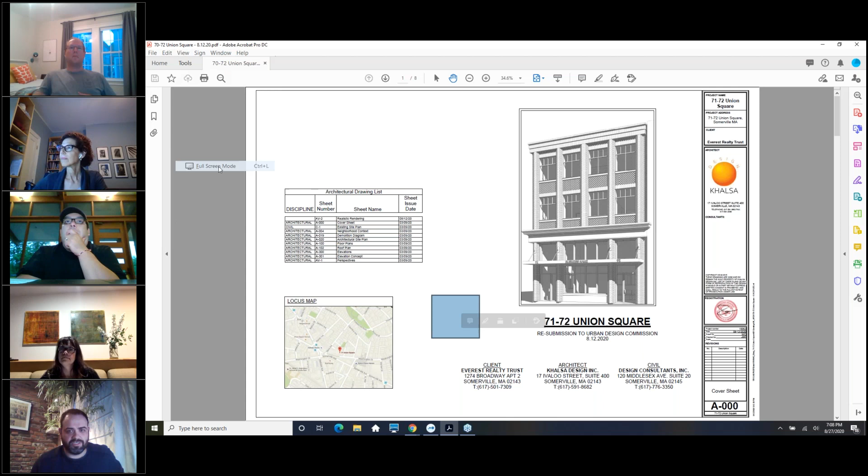So with that, I guess I will turn it over to Will Chalfant, the architect. Thanks, Adam. So how do I share my screen on this one? Because I'm not seeing that. Oh, look at that. Just as I said it, it popped up. Okay. All right, so can everyone see this? I can. Looking good. Okay.

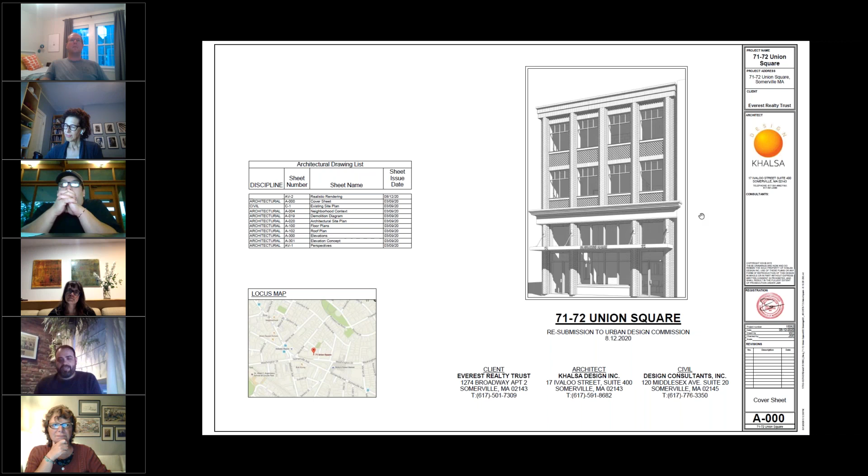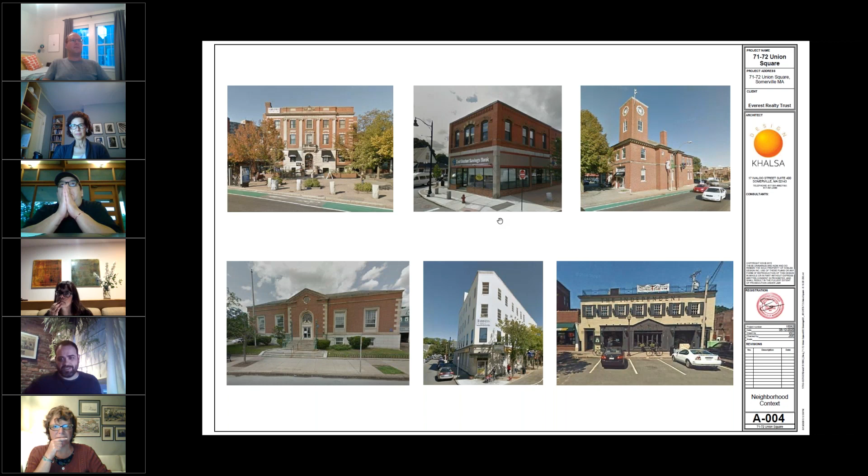All right, great. So thank you again, Will Chalfant from Khalsa Design. Just to refamiliarize yourself with the project, of course this is the formerly Subway and most recently liquor store in Union Square, adjacent to the Independent and in between the Independent and the former police station. So I know we've gone over the contextual buildings in the neighborhood. The zoning, we'll address that at a later date.

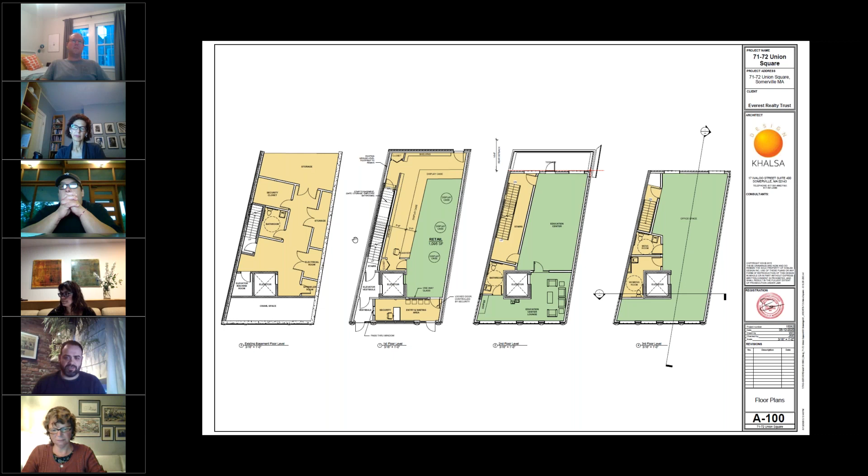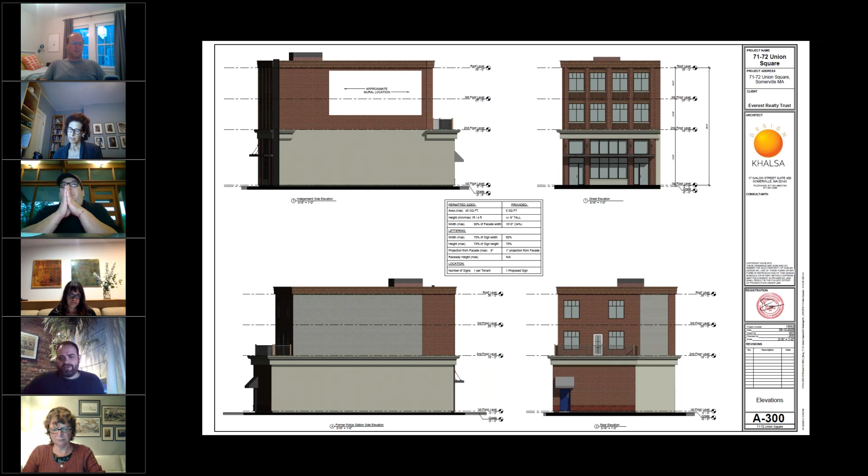So, okay, whoops, sorry about that. And here we have the proposed elevations, but I think I'd rather skip through this and go to the proposal and show the before and after.

So what we heard from the board was that the proposal is trying a little too hard to fit into the historic nature of its neighbors. There was a third floor trellis and narrow patio space that many felt really weren't appropriate for the building itself, and that the building read flat and lacked texture. And as well, we had an abundance of cornices.

So we've revised this in a few different ways. We tried to use traditional materials such as brick in a slightly more contemporary fashion. This allows the building to not feel dated, but also transition into the next phase of Union Square. This texture that we've created is being achieved through creating some pilasters using the brick, as well as some, for lack of a better term, a Flemish bond half brick, which provides that texture in between the windows.

We've also tried to simplify the material palette. We'd shown previously a lot of limestone, some different precast elements, and really the building reads better per your guidance, which I think was really well thought out. The building reads better as almost an entirely brick building. We're still showing a stone water table at the base, but we wanted to bring some of that texture down to the ground level with these brick pilasters and make a more tactile feel to the ground level.

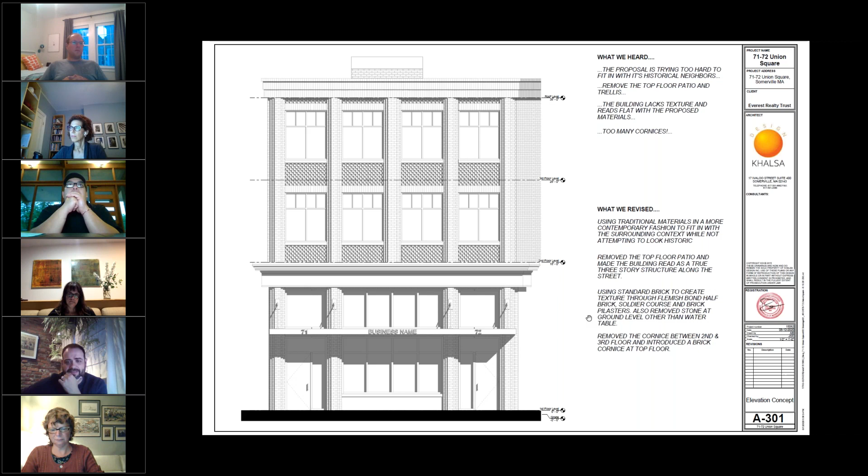And then, of course, we've removed that cornice and that patio space, which allows the building to read a lot more successfully in its fabric.

So here we've shown a sort of pop-up version, with the left, middle, and right. It's all looking at the front, but I wanted to outline the materials we're proposing to use. Starting on the left, at the ground level, we're showing a stone water table under the center portion of the storefront, flanked by brick pilasters that step in and out toward the center of each pilaster, giving some depth to the facade.

And then again, a stone precast cornice, precast sills, but we're using a soldier course for the header on these windows. The top cornice is brick made up of a soldier course, and we're proposing that in a different hue than the rest of the building. I looked at it originally as a traditional brick, and it kind of got lost, and I think this creates a nice cap to the building.

We've also changed the window style, but maintained the entrance canopy, as well as the two entrances going into the building.

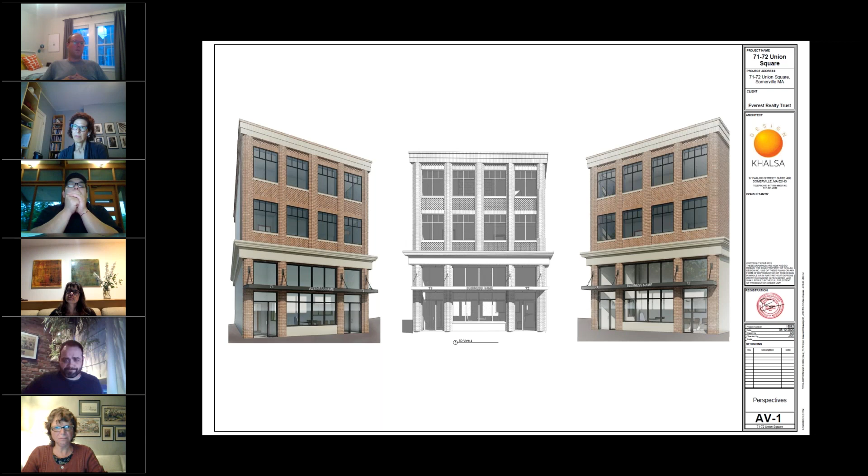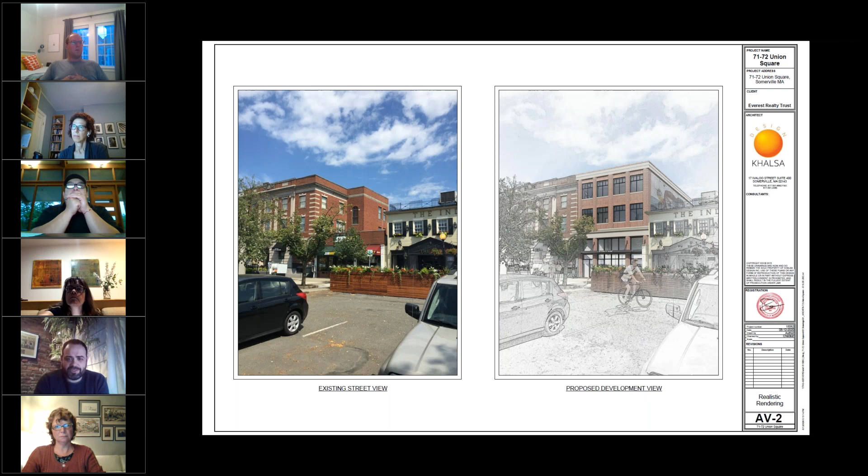I know previously it had a bit of an amateurish rendering, so we've changed that. This shows how it fits in with the neighbors.

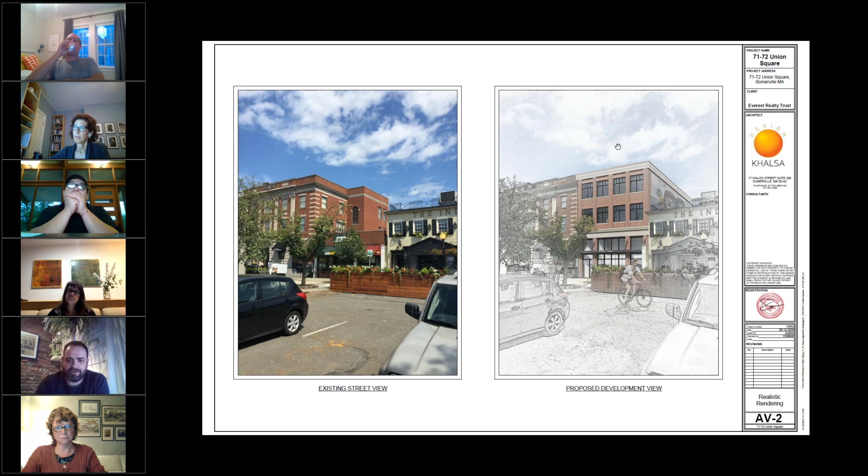There had been mention of the right wall in this view that faces the Independent being somewhat blank. We had originally shown it as CMU, but upon further reflection realized that really isn't going to be acceptable, because I don't think anyone expects the Independent to go anywhere. We can't infill windows here being on the zero lot line, but we thought this was a nice opportunity to possibly showcase a mural of a local artist. I know Somerville has many, as well as Cambridge — I'm working with Street Theory in Cambridge on a few other projects. So I think this is a great opportunity to utilize an otherwise blank wall as something that activates that facade.

So, I don't want to take too much time. I'd like to hear the board's input here. I think I'll click off if that works for everyone, and we can begin the discussion, unless you want me to leave it up. It's up to you.

Okay, so I'd love to hear your input. I had a question — the building to the left, are those windows that you were abutting to disappearing?

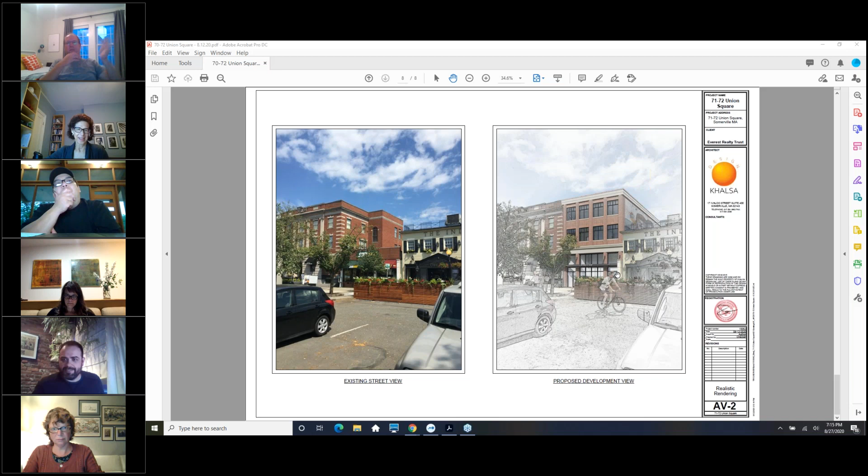On the police station? Yeah. No — so the building actually, I should probably share my screen again. Hang on one second. Sorry. Can you see the screen? Yeah. So it's actually notched right here, which allows us not to cover — I mean, those windows can still be utilized — because of the angle of the building itself and the lot. Yeah, yeah.

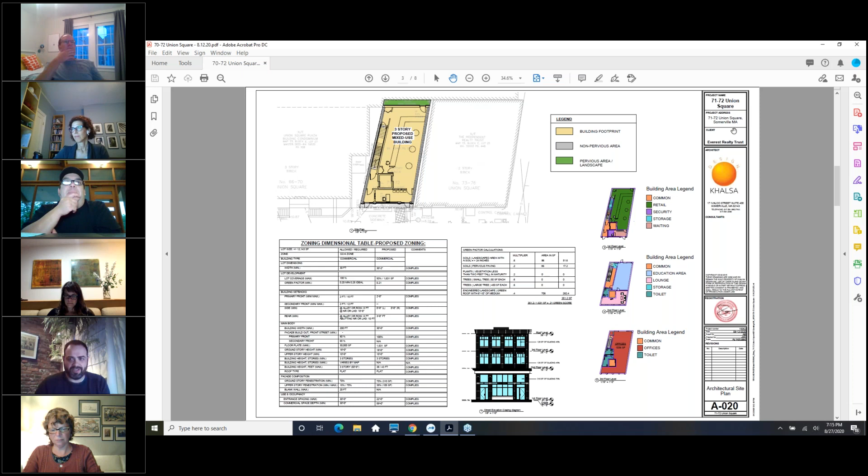And did you stay with just a regular standard brick? Yeah, full bed brick, not a thin brick. I haven't gotten into the actual color yet — I think we'd be open to discussion on that. I would probably go with maybe a light iron spot, something with a little bit of texture to it and color variation, as opposed to a glazed brick or something like that. Maybe we look at that for the top cornice, but in general, more of a traditional — God, I forget the term for the red color we use on a lot of projects — but we'd certainly be willing to provide different samples if the board wanted to see some different options. Yeah, no, we would love to see some options.

I would like to say that it's a leap from where you presented last time to now. I think the texture and articulation of the brick and what you've done to the facade really makes it stand out a little bit and gives it a contemporary component without necessarily trying to blend in with historicism. So I compliment you on doing a really good job trying to address some of the concerns we had from last time.

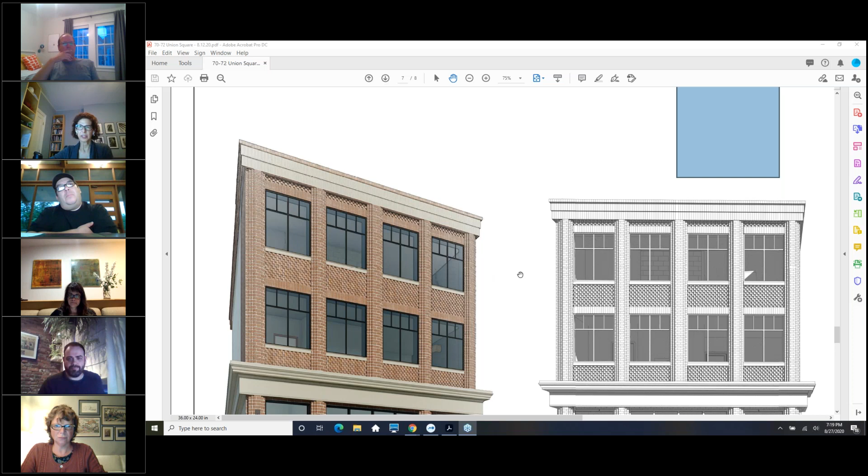Yeah, I agree with Frank's comment that this has really come a long way. And I also really appreciate the views you gave us, especially that one that Frank can ask the same question - what happened to those windows? We couldn't have seen it in context as well without that. I think this is very helpful in being able to talk about the project.

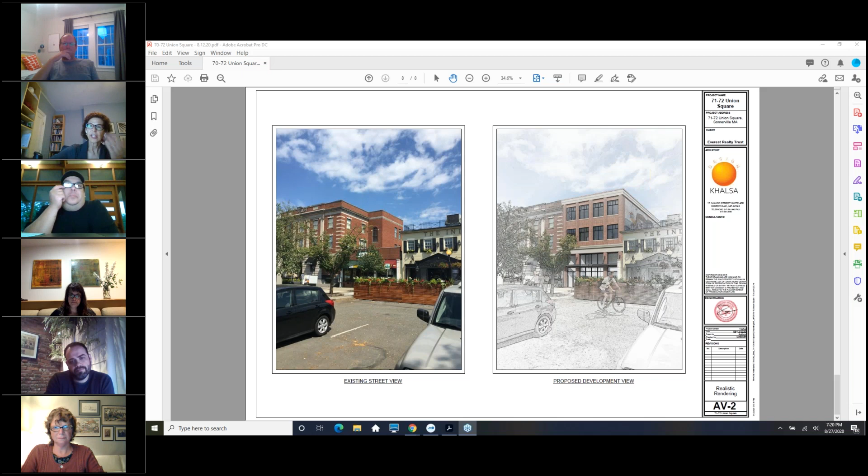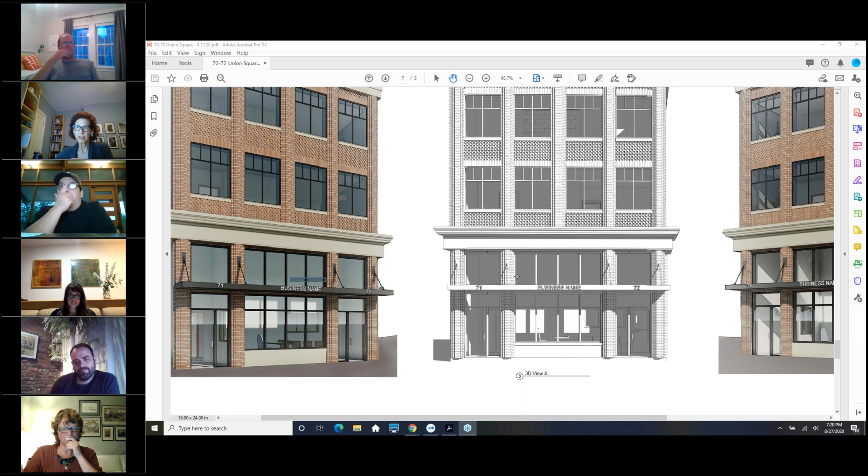The one minor thing that isn't quite squaring with me is the bottom, the storefront area. Up to that first cornice feels somewhat contemporary in the glazing that's input, and then the glazing above feels very thin and a different language. I know it's a different kind of space, but in my mind it's maybe got too much detail to it to go with the proportions and scale of the glazing below. Not that you have to match that, because I know that's storefront and you want it to have a different scale and more open. But that's the one area I feel isn't quite working for me.

Just so I understand, would you rather see more muntins on the lower level, or- sorry, maybe I would look at the upper level. And see - I don't know whether those are operable windows and how they operate. That may start to suggest a language to you about how to break them up.

We originally had double hung windows, which are obviously traditional in a lot of instances, but I think are predominantly more applicable for residential application. So what I was trying to do was use something a little more akin to the commercial and office use that this will be.

But I understand what you're saying. I think we could certainly look at changing up the mullions on this and giving a little more relationship to the glazing below.

Yeah, and I don't know if they are operable, so I could imagine those having an operable, what is it, awning type of window, and when you start to look at the assembly of those things, it would give it a scale - you're trying to reduce the scale by having those divided lights on the top.

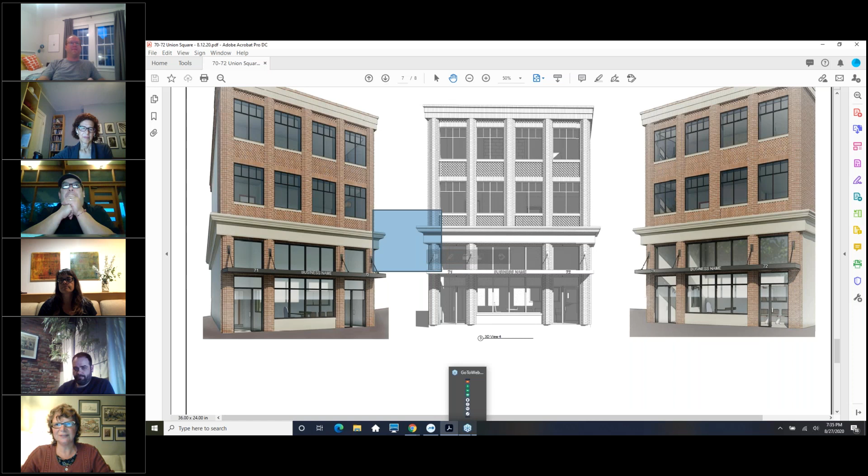Okay, do I have a motion that all design guidelines have been achieved? Yes, I motion. Second by Deborah. Deborah seconds. All right, roll call vote. Andrew? Yes. Frank? Yes. Deborah? Yes. Louisa? Yes. And I, Sarah, also vote yes.

So thank you, thank you William. Thank you very much, I really appreciate the input, and I do think this is a much more successful project, so I appreciate it. Thank you all very much for your time and your input on this. Your expertise was invaluable. Thank you. Thank you, Adam. Bye-bye.

All right, so next we have a building on Broadway that I can't remember the address of right this moment. Oh, I've got it here. 152, or 158 Broadway.

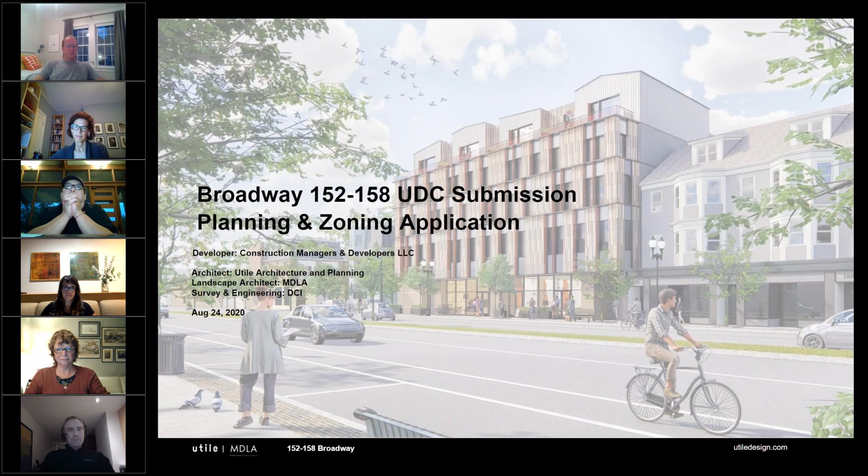We're just going to hit some basic summary about the development. Hopefully you had a chance to review all that. We'll talk a little bit about context, get into the facade design, ground floor, storefront, and then we're going to have MDLA present the landscape strategies for this. We won't go through any of the appendix information unless we need to call it up for some reason, if there's a question about anything.

So in general, we're in an MR5 zoning district. The total gross square footage of the project is about 38,000 square feet. We also have about 3,000 square feet of outdoor space, most of which is amenitized for our residents. We're at 5 stories, 58 feet, 45 residential units, 9 of which are affordable, and 2 of those are 3-bedroom family units. We've got about 4,100 square feet of leasable retail space at the ground floor. We're exceeding our green score by an awful lot, which we love. And we're also planning to go for passive house certification on this, and net zero ready.

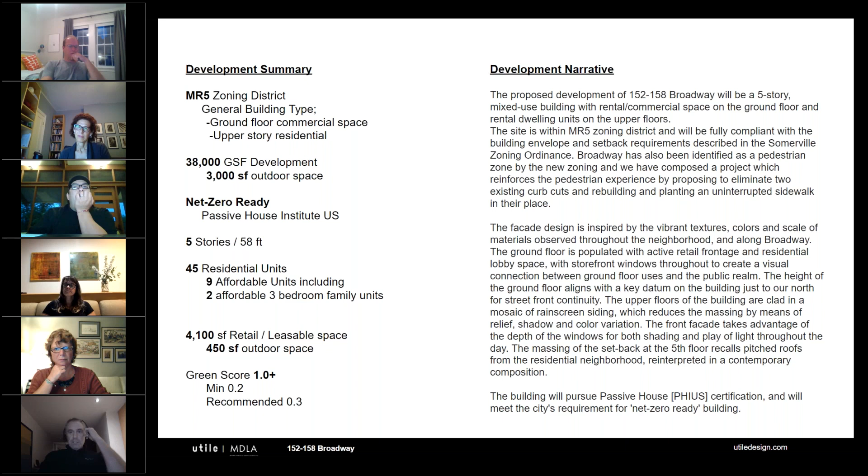One of the things I love is when a city adopts new zoning codes that incentivize us to do really cool things like passive house, so we think it's great. Our client, the proponent of this, is actually now in the process of getting himself passive house certified, which never would have happened if it wasn't for your new very cool zoning guidelines. We think that's a great tip of the hat to the new zoning.

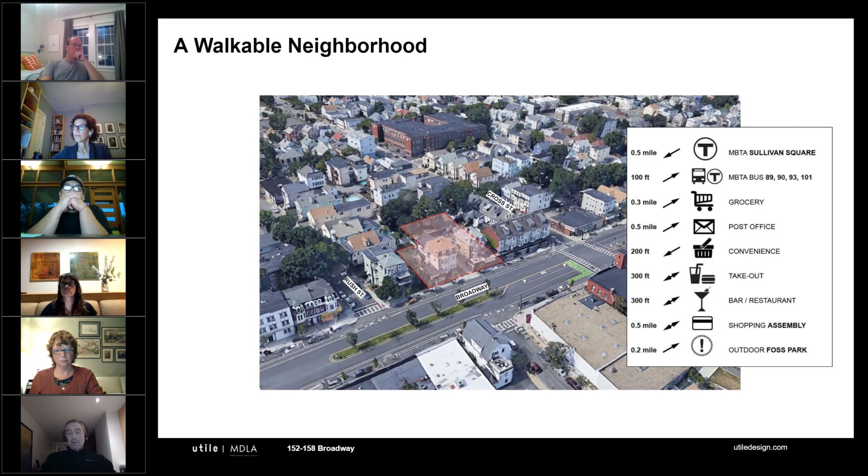I'll get right into some of the context here. Like we said, Broadway is an immensely walkable neighborhood. We're very close to transportation. We've got grocery stores, post offices, convenience stores, takeout food, bar and restaurant, shopping, and parks, all very close to us. It really is a great pedestrian zone or pedestrian district, and has been called out as such in the new zoning guidelines.

This is a quick look at some of the existing buildings that are there. With the red dash line, you can see the extent of our property. It's just over 100 feet from edge to edge of our property. You can see the buildings here, some are 3-story residential, some are 4-story with a kind of base, middle, top to them. We think that's an important clue for us.

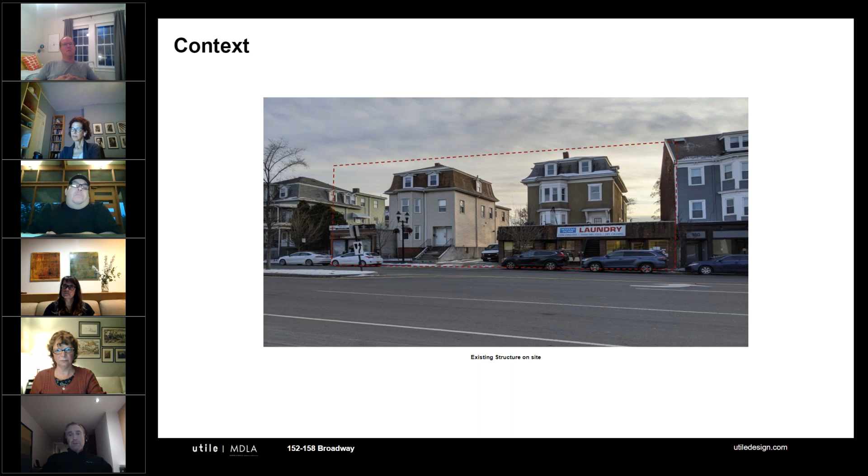We also want to note that this really is a kind of a clapboard neighborhood right along here, and we don't see a whole lot of brick along this particular stretch. So that informed us a little bit when we started thinking about our materiality.

This is a view from across the street looking at our building. You can see there's an apartment building to the right of us, it's 4 stories. And then looking at our building again, trying to pick up on that base, middle, and top. We took a lot of effort looking at that top penthouse level, or that 5th floor. It does set back per the zoning, but we set it back even further in some locations to try to break the scale of that top level down, objectify those smaller components at the top, and give them a little bit of a penthouse kind of look and feel.

We're using a 5-inch Okoskin cladding on the middle part of the building. That's a through-color cementitious fiber cement panel, in this case fiber cement board, which we think is a great allegory to the scale of the clapboards in the neighborhood, and the texture of the cladding that we generally have found there.

The ground floor we've populated with all kinds of active uses, including our 4,100 square feet of retail, our residential lobby, and we're really happy that we're going to be closing up the gap between the 2 existing buildings that are there right now.

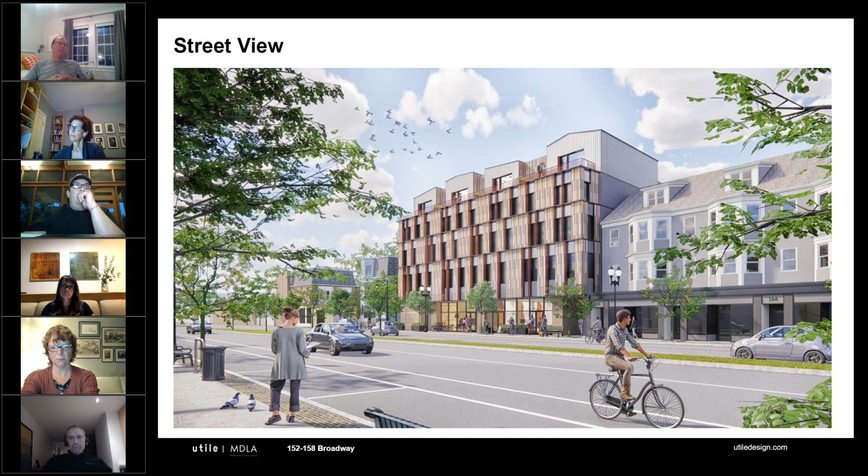This is a view from the other side. One thing we're trying to pick up on is the building to the right of us. The base of that, which is retail, has a very strong datum at that first floor storefront level, and we're doing our best to pick up on that and continue the continuity of those active storefronts along Broadway here.

Again, looking from the other side, we're trying very hard to make sure the scale of this works—scale is kind of an operative word here, in terms of breaking the components of our building down into smaller pieces, but also smaller textures when it comes to the cladding and the top level penthouse.

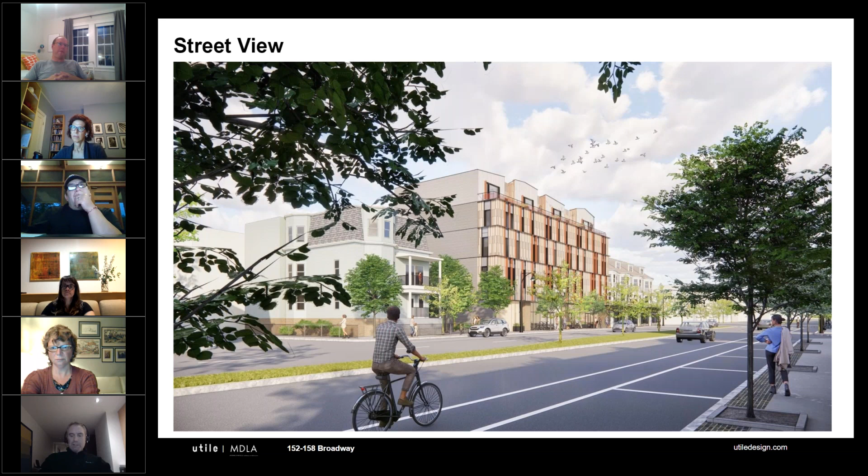Also, because this is a southeast, southwest facing facade, we are shading our windows, and the windows on this backside get a little smaller than the front. We're doing that because we've already been modeling our passive house strategies on this, and it seems like a great way to hit the benchmarks we're trying to hit.

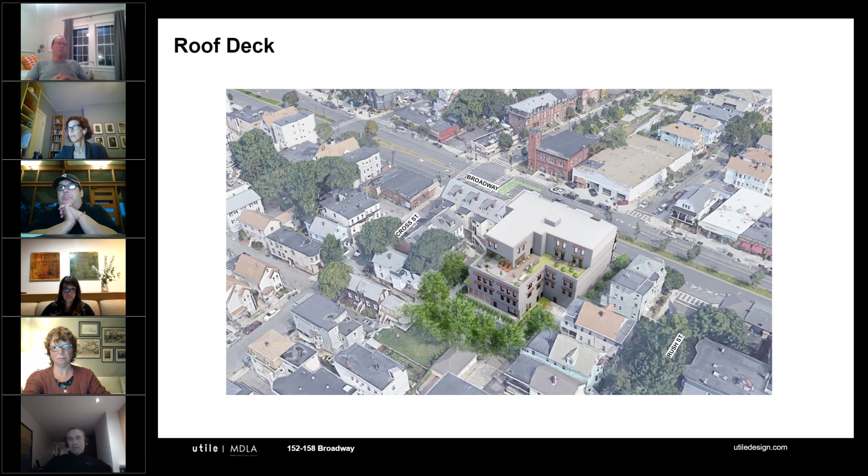So, materials: the base of the building at ground level is primarily a warm tan gray brick. The body of the building, the middle, is Okoskin, and we're trying to pick up on an array of subtly different colors that give that facade more richness and play up the scale, rather than making it look monolithic—making it look like a series of small components working together in harmony.

We're setting the windows back from the outer facade to do a couple of things. One, it gives the building a lot more depth, emphasizing the frame around each window. It also works because this is our northeast facade along Broadway, and we're using that as a shading device, particularly in summer months when the sun comes up north of due east and becomes a big heat gain in the morning for some of these buildings.

At the very top, we're using a concealed standing seam metal panel for those penthouse objects up top, and we've got a steel picket rail just above the fourth floor, which gives us our guardrail for the terraces where that fifth floor is set back. It also gives a bit more filigree to the top, a kind of ornamentation just above the cladding of the main facade.

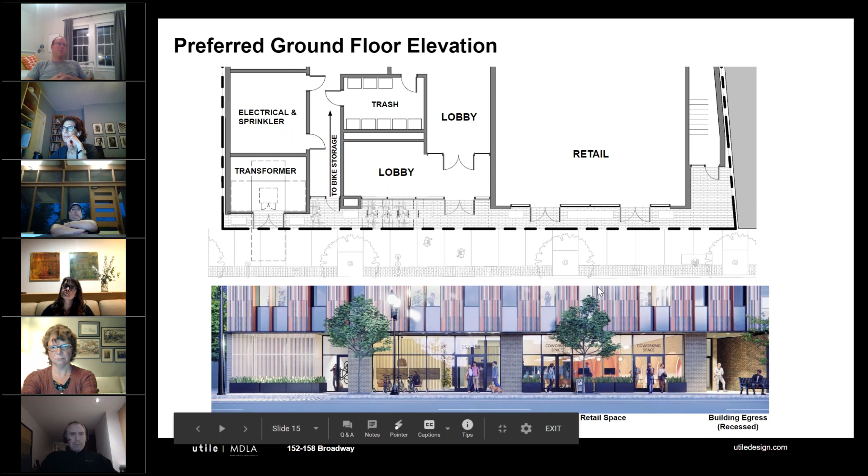We looked at a couple other options down there, and I think when we talked with Rebecca early on, she made the comment that there wasn't quite enough activity here, that maybe some of our proposed uses on that ground floor weren't active enough.

So having reshuffled some of these uses around, with a better treatment for the transformer and all that, we feel like we're creating what will be a continuous, active and comfortable ground floor storefront along that sidewalk, which has been made continuous, and we've gotten rid of the two curb cuts.

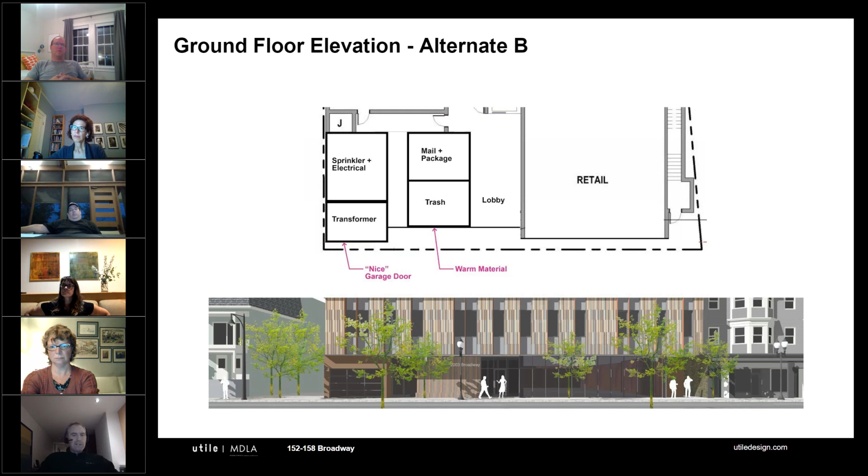And then another option here, which we felt was again a little bit maybe more abstract than the neighborhood probably would want. That's why we added our brick pilasters on those 30-foot increments — those are part of the design guidelines anyway. And we're able to activate more of that facade in general with the program.

So we'll hand it over to Michael D'Angelo.

Dan, I don't know if you've given him the ability to mic, but Michael, if you just tell me when to forward, I can do that for you.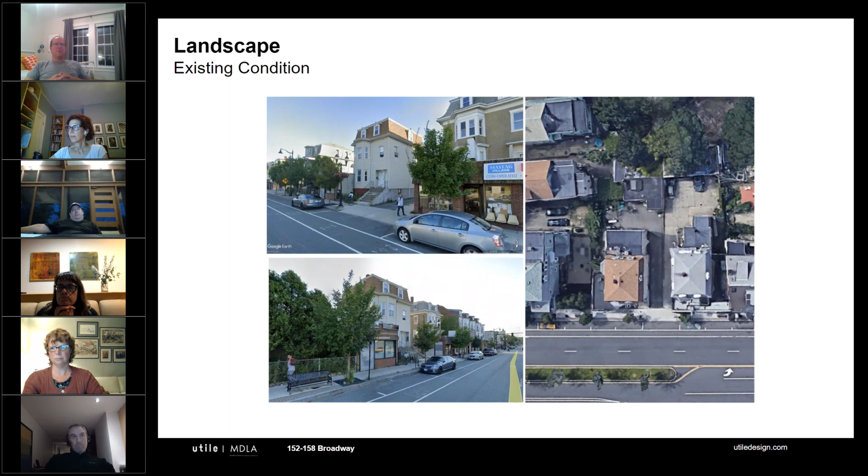Next slide. So you can see we're reconstructing the sidewalk, infilling the existing curb cut and matching that treatment. Once you get to our property line, we start to reflect what's taking place with the building, so maybe some permeable paver apron at the building edge that complements the facade color or trim. You can see some bike racks in front of that mail and package room, some raised planters, and as we work around to the rear of the building, we also have permeable paving back there. As Michael mentioned, there's a very large bike room that spills out onto a small patio.

We thought it'd be kind of fun to have some outdoor workstations so you can work on your bike outside. There's a small dog run accessible from the lobby, and a very large patio in the back for use by the retail tenant, whatever type of retail that is. Along the rear property line, we want to get a lot of trees in there to really screen it. You get some pretty good southern exposure back here even though we're down low. We have several columnar hornbeam planted against that rear fence line, and again, all permeable pavers.

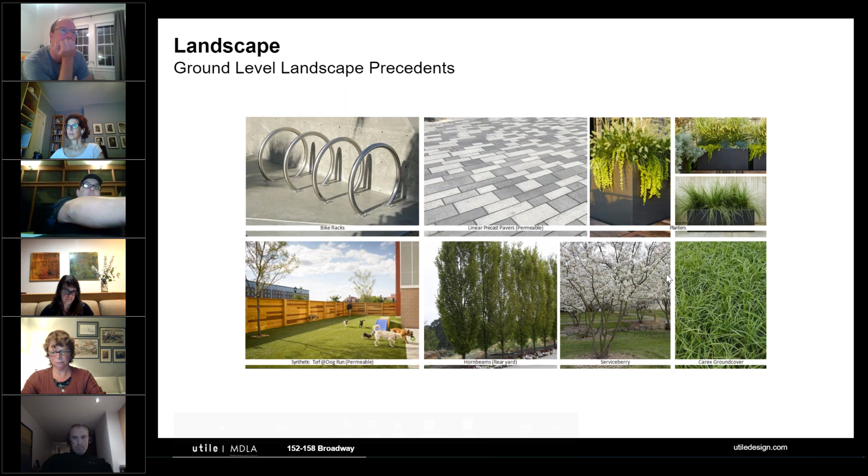This is the amenity roof terrace, off of the amenity space for the building. To the left side of the plan you'll see two private unit decks surrounded by vegetated green roof sedum trays. As you move toward the public or main building amenity area, we have this deck surfacing that extends out to an area with lounge seating, chaise lounge chairs, great southern exposure on this roof terrace, which is really cool, and some flowering trees and pots which we could uplight.

Here's some precedent images. You can see the types of lounge furnishing, the vegetated green roof, the decking. We will not have a fire pit on the roof—it'll be more lounge style furnishings.

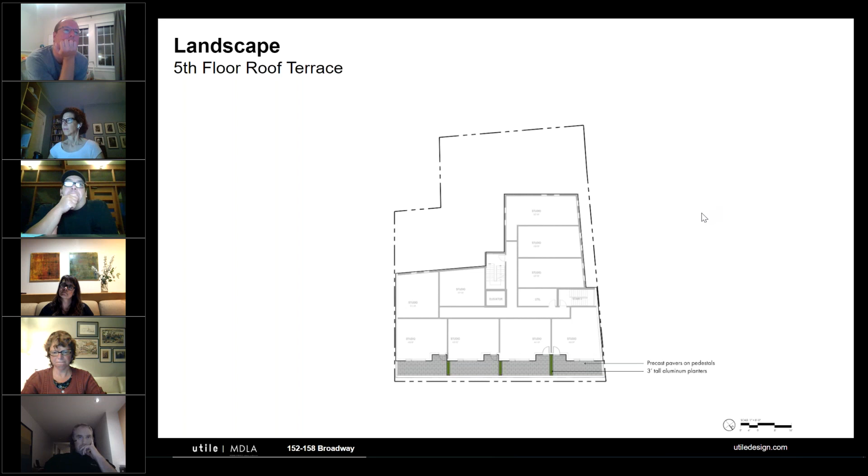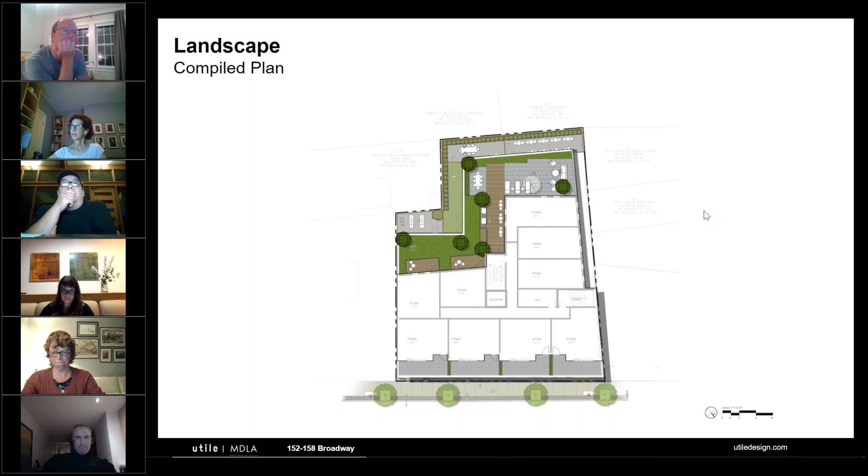The last piece of this is the 5th floor roof terrace at the penthouses. Those will simply be pavers on pedestals with some vegetation separating each unit. This is the overall plan, which gives you a sense of the amount of landscape we were able to squeeze onto this site. As Michael said, we've exceeded the green score requirements by quite a bit. So that's the visual component of the presentation.

Love to hear if you have any questions or comments for us.

I'm curious about the striated fiber cement—I'm not familiar with that product. Does it have any depth to it, or is it like painted colors? Can you describe it a bit? Sure, the material itself is only about a half an inch deep in thickness. It's through color, so it's integrally colored all the way through—it's not a product that needs to be painted, and not one you have to worry about looking shabby or peeling in the years after it's constructed. The detail we're going to have at the windows will create a fair amount of depth between the front of the cement board and the actual windows behind, about an 8 to 10 inch depth, which we feel is great for getting shading for the windows on the side and top, but also for getting that great play of light across the facade, particularly in the mornings for this facade.

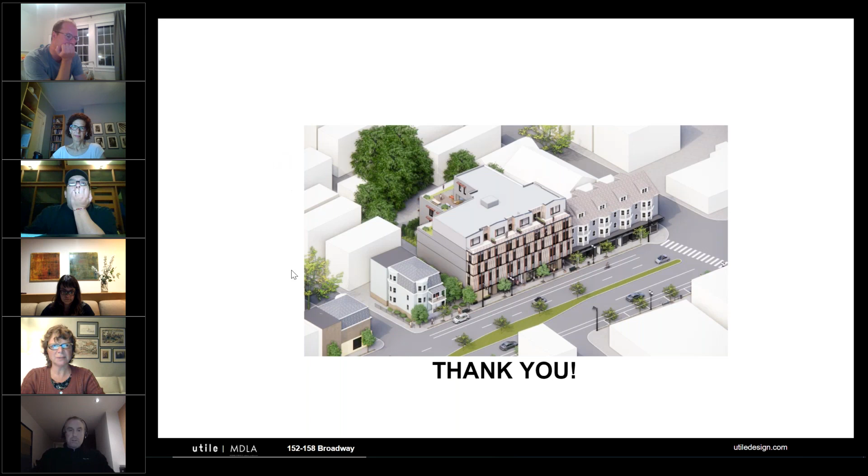So we'll start with the preferred, but was there a particular one you wanted to see? No, there's no way to show them side by side. I could do that, it might take me a moment though. Would that help the rest of the commission, or are we comfortable with the preferred?

In terms of the 3 facade options, I can say that I strongly prefer the one that they've gone with. I appreciate having seen the other 2 because I think it reinforces that I like the one they went with. Facade option A feels extraordinarily heavy and out of character with the neighborhood, which I think was identified by the team.

And then the next one, I agree, that's nice, but it feels like a monumental building. It feels like a library, like something that would be the focal point of this neighborhood. And given the program, I don't think that's appropriate for an apartment building.

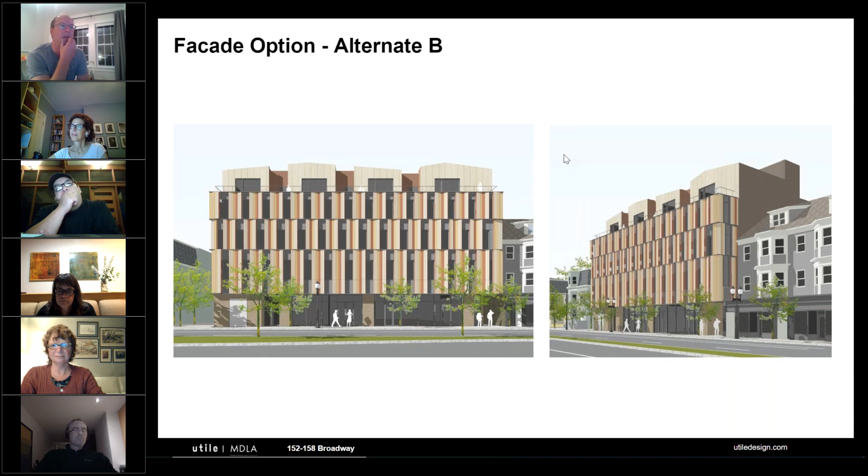So I think the way they've gone through these and ended up where they are, it looks like a distinctive building that still belongs in East Somerville, or could belong in East Somerville.

Yeah, I agree. I'm really fascinated by these striated panels. Do you do a custom pattern to them and then array them, upside down and right side up, so you can get the striations at that intermediate, tertiary scale? The shop drawing process on that is going to be intense.

Yes, there is a pattern to it that once our facade subcontractor is familiar with it, it will be fairly simple for them to pull together. But certainly we're going to dictate every board there on that front.

I also wanted to comment on the penthouse level. I really appreciate the one you're going with. I agree, the preferred option is very strong and makes a lot of sense in its context. But I think the penthouse level is really quite wonderful, what you've done with that.

Thank you. I had a question I wanted to pose back to Deborah, Andrew, and Frank on that. If you look at the image on the right, we are showing the Oko Skin material as infill where those setbacks are, between the more frontal volumes we're expressing there. We've debated this a lot internally on the team, whether only the back wall should be the Oko Skin, or whether it should turn along the side, that additional 4-foot side.

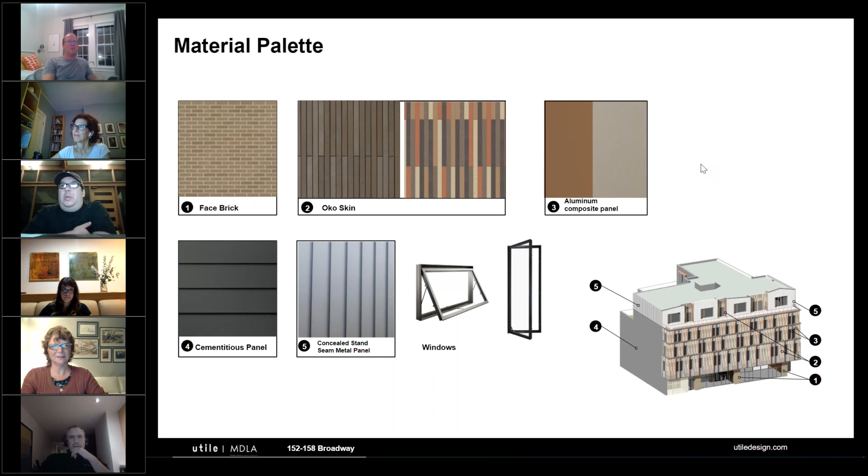It's not like Hardie Panel. It's a very different product. It doesn't need to be painted. It doesn't start to fray. Water doesn't break it down. It's used very much like in a rain screen configuration, which is going to allow us to have better continuous insulation on the outside of the building and achieve those passive house requirements much more easily.

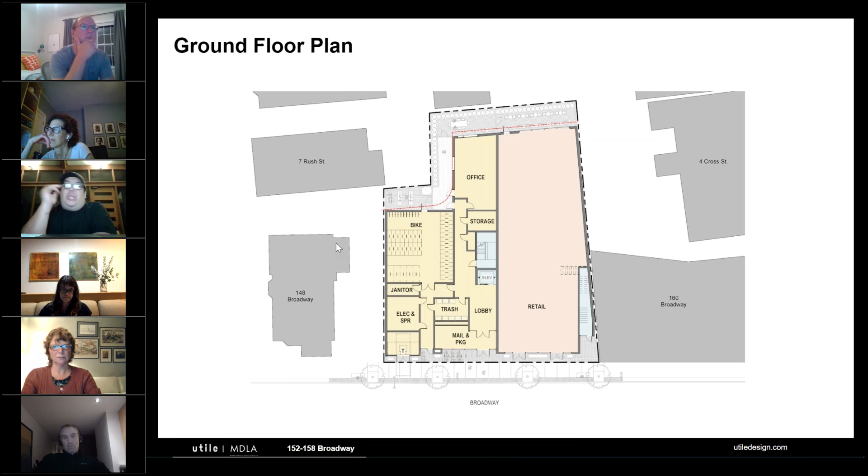So are you moving forward? This is just a general question, and Dan, this might be more for you. Are you moving this project forward with the idea that it is passive house, or are you moving forward with the base concept, hoping that it would become passive house?

I wish our sustainability director were here to explain how we approach that, because that's something we start working on from day one with any building. We find if you try to backtrack on it, it becomes very difficult to recoup and get your building to where it needs to be. So yes, we are looking to do passive house on this. That is the plan.

Doing passive house allows higher density, and the sustainability division has criteria for submitting documentation as they advance through the certification process, aligning with the zoning approval, building permit, and certificate of occupancy stages as this continues to move forward.

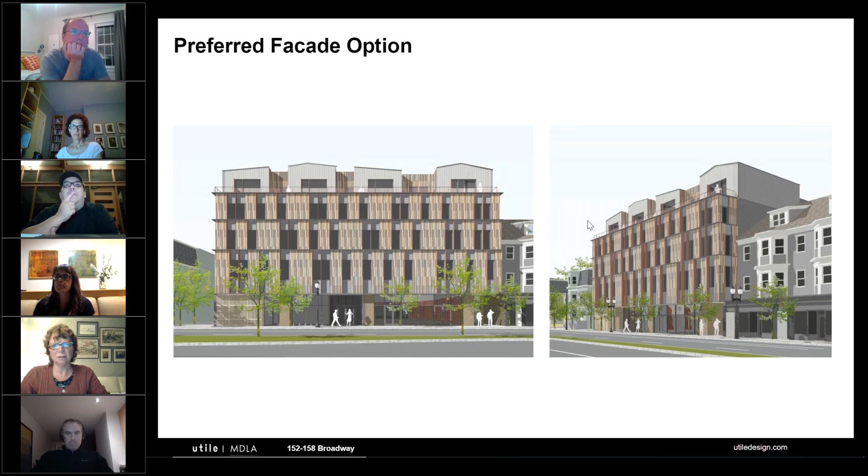Louisa, did you have a question? I did. I was hoping we could go back to the ground floor landscape plan, please. I wanted to understand a little bit more about the dog run and the system for containing dog waste and smells, please.

Hello, can you guys hear me? Yep. That's a very common concern we come across. As we get into it, we'll look at a couple different methods. One common way to deal with it is to make sure you have a really good permeable base, which we will for this project. In addition, we'd like to add irrigation heads so it's continually being washed out - a scheduled spray of water to keep the odor down. It will be a specific turf manufactured for this purpose, made to drain vertically.

The other question I have is generally we don't allow dog runs in residential neighborhoods. Obviously this is a little different because it's on your property, but there should be a limit to how many dogs are in there at a time to avoid noise - we get a lot of complaints about dog parks and dog runs. I would like to see the specifications of the turf system when you develop that.

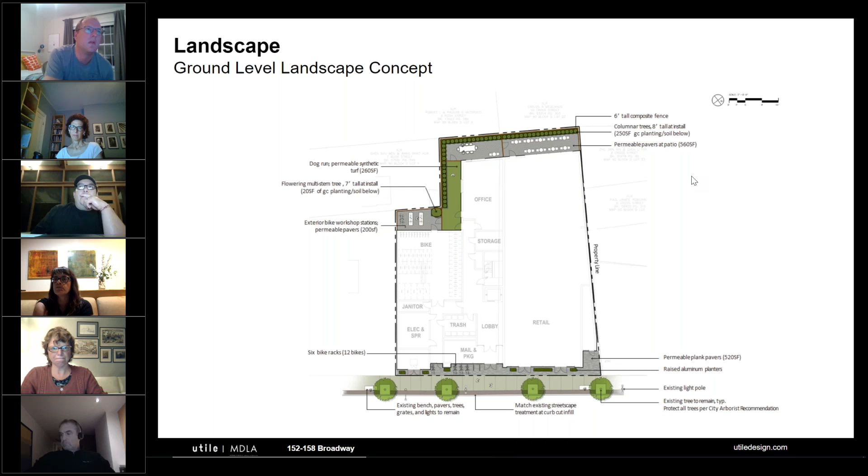I have two additional comments on the open space. One is on the street trees - as they are developed, I'd like the urban forester to weigh in on their species, since she's familiar with the whole urban canopy and will have species preferences. My last question is about the green roof and the sedum, and how that is maintained in the long term.

Yes, I think they're keeping the existing street trees. We'd like to try to keep the existing ones, and as we move forward, we could take a closer look and make sure that's actually a viable option. We think it is now, but we'll definitely examine that, and we'll touch base with your arborist and work with them if needed.

One note on that, if you're going to remove them, there's a process for that, so do be in touch with our division.

The green roof, as we develop this, we'll look at a couple of different ways to do it. Since it's a small area, we'd probably do a tray system with removable edges, so the soil volumes and roots touch and act as one piece, but it's put down as a tray. It's called LiveRoof, and it's all sedum with good southern exposure, so we're confident this will get the right amount of sun, which is crucial for sedum.

Ideally, I'd like to see some kind of low, very high efficiency irrigation system, just in case we get some really brutal summer months or summer weeks, and that will help at least get it through those periods of time.

Our concern is more that the green roof helps in every way with the green score, but once you walk away from the building, we want to know that in 10 years it's still being maintained and behaving as intended. So with all landscape stuff, we like to see some maintenance plans, because what we'd hate is for it to get designed in and three years from now all that sedum dries out because an irrigation head went out, and, oh well.

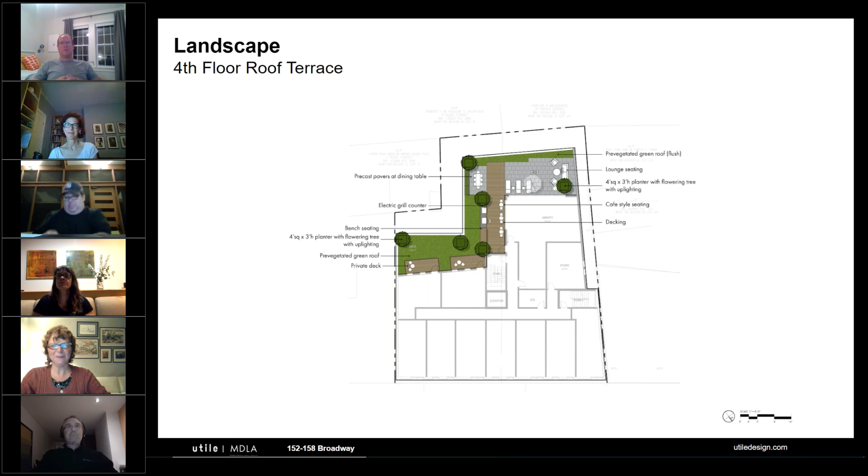I move to adjourn this meeting, do I have a second? It's been a 15-hour workday, let's fight over our second. Deborah seconds. Roll call vote: Andrew, yes. Frank, yes. Deborah, yes. Louisa, oh God, yes.

So one last question before we all leave - I seconded that, go ahead Frank. How does everybody feel about trying to move these things to a little more of a reasonable time, either 6 or something, just so it doesn't seem like such a long day? I mean, it's 8:30, it seems like - yep.

I've been working since 8 o'clock for me, so it's 12 hours. If there's a possibility - yeah, and I also have to deal with my kids. I think as long as we're virtual this makes a lot of sense, because we just stay in our seats and keep going - it's not like we have to show up somewhere. I'm in the Berkshires right now. I agree with Deborah, virtual makes no difference to me. A little hard to get there by 6, but we're going to be virtual for a long time.

One other quick update - we have a uniform job application open for various board seats, and we've had 12 people express interest. So we might end up with some more UDC members in short order. The approval process can be long, but at least we have some applicants. I don't know who they all are yet. Good luck, sure they're delightful.